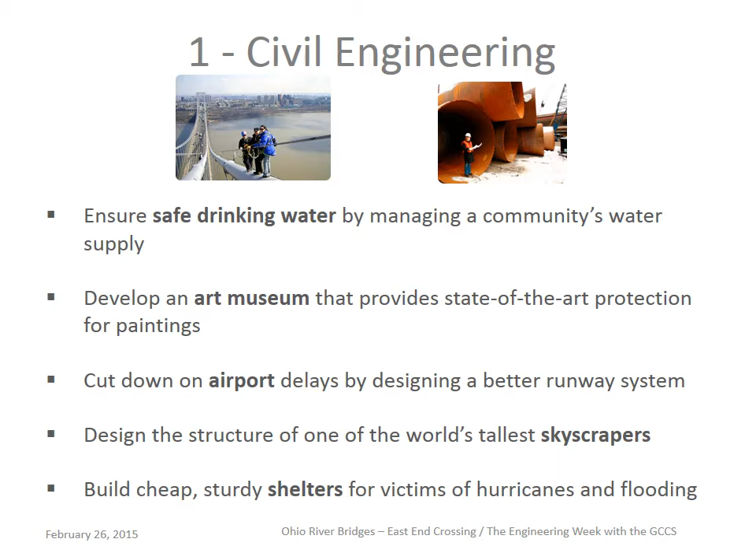A video from the American Society of Civil Engineers will now be streamed. In this video, you will be able to listen to the point of view of 3 civil engineers on what they do.

Now, we will give you an overview of what's happened on the Ohio River Bridges East End Crossing. First, who is involved in this project? Walsh Construction and Vinci Construction Grands Projets set up a joint venture for performing together the design and the construction of the Ohio River Bridges East End Crossing. Another joint venture has been set up between Bilfinger, Walsh, and Vinci for the operation and maintenance of the project.

The construction stage started in 2012 and should be completed at the end of 2016. And the operation and maintenance stage will last 35 years from the beginning of the construction. This project is particular. Actually, this is the first availability-based transportation public-private partnership project in the states of Kentucky and Indiana. This new kind of project brings together the public side of a state with private companies to create new infrastructures necessary for the development of communities.

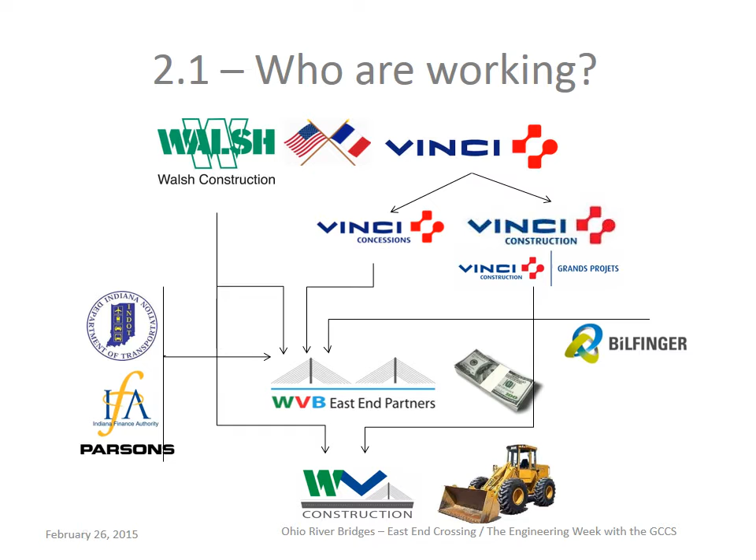Now, we will show you where this project is ongoing. Actually, the Ohio River Bridges includes 2 projects. One in the downtown of the city of Louisville, and one other in the eastern part of the city. The Ohio River Bridges East End Crossing project is the highway which will allow crossing the Ohio River and linking the 265 in the eastern part of Jefferson County.

On the map you can see in red color the Ohio River Bridges East End Crossing. And you can see the location of your school, Jeffersonville High School, Charlestown High School, or Washington High School.

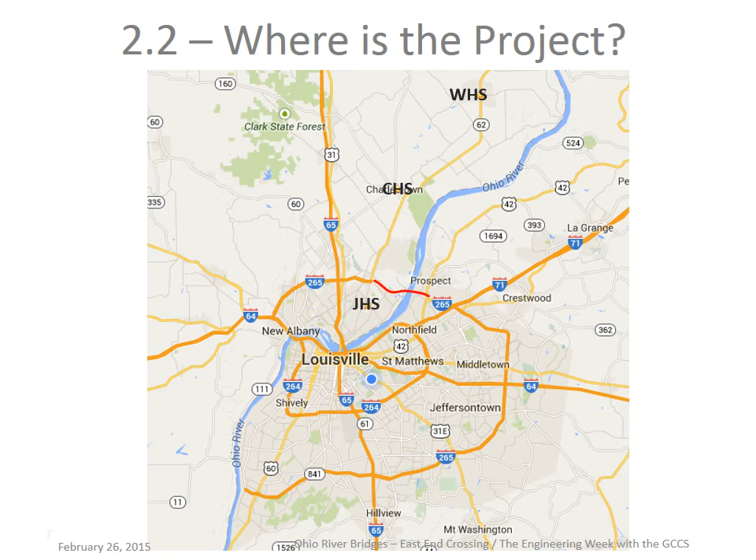So, what is under construction? In Kentucky, there is a twin tunnel, which has been planned to cross the historic Drumanard Estate. As the highway should be planned as straight as possible, a couple of bridges are under construction to cross existing roads and streams in the area. Moreover, a cable-stayed bridge is under construction to cross the Ohio River. And in Indiana, bridges and interchanges are in progress to link the highway to the existing 265.

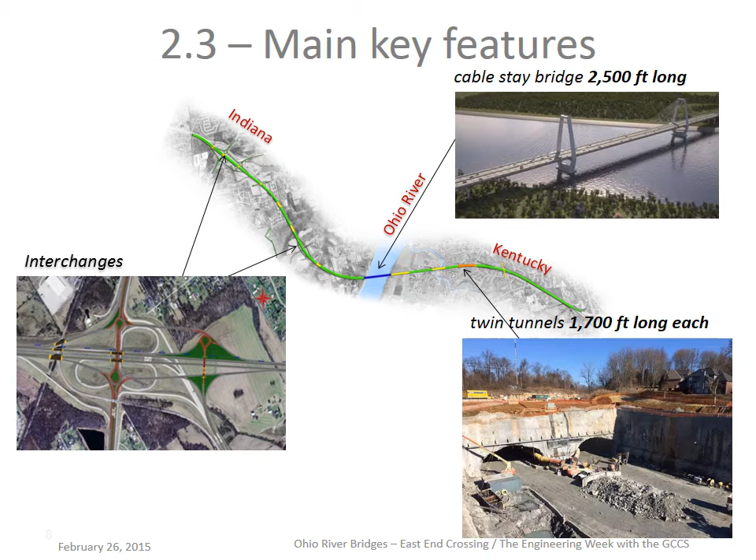As a picture may be worth 1,000 words, a 4-minute video will show you the main parts of the project. In more detail, in Kentucky, we are building 4 bridges and a tunnel as shown on this slide.

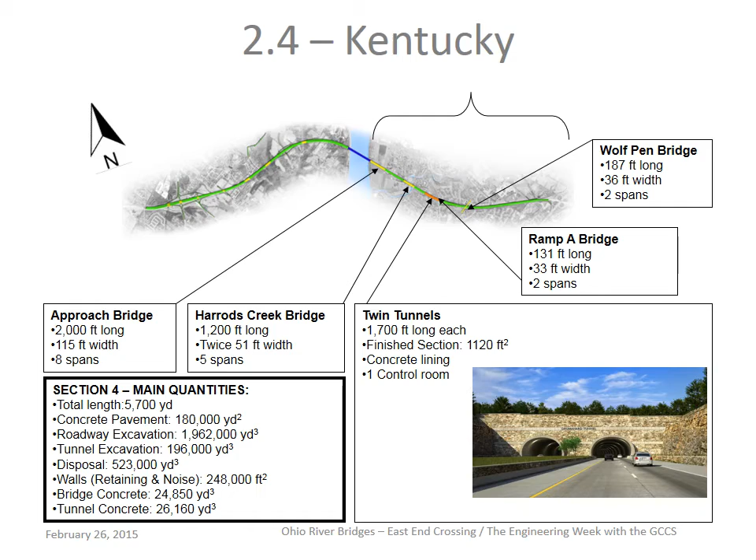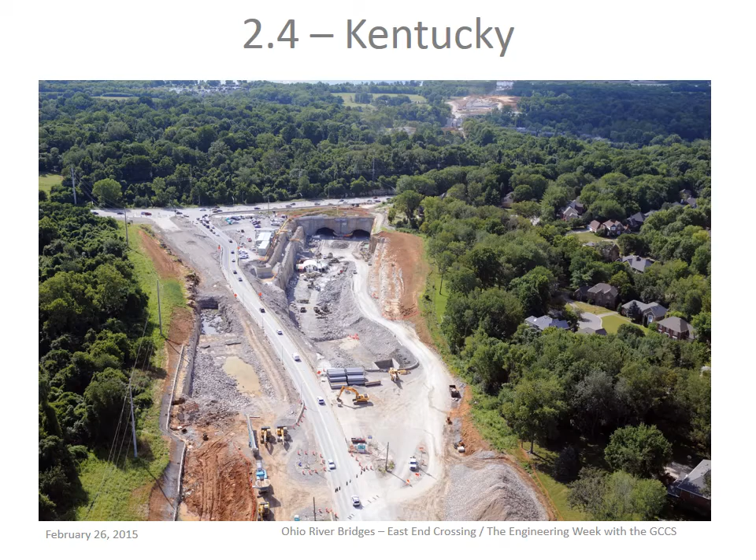On this picture, you can see the entrance of the tunnel in the foreground, and its exit in the background of the picture. It highlights that the historical area of Drumanard is preserved from any impact that a highway can have. In September 2014, the tunnel breakthrough was completed. It means that the tunnel goes from its start to its end under the Drumanard Estate area. Now, on this other picture taken this summer, you have an overview of the construction which is in progress along an existing road.

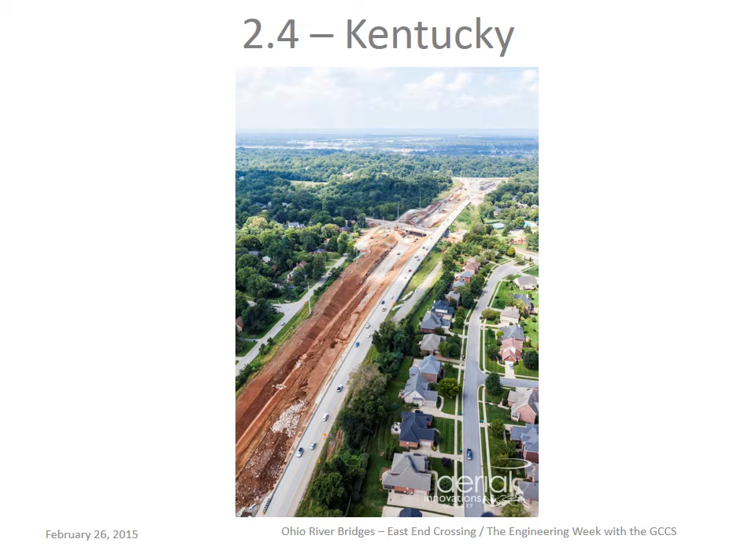Then, to cross the Ohio River, a cable-stayed bridge is under construction. This bridge stands on 2 concrete towers which extend approximately 300 feet above normal pool elevation. These towers are currently in progress and will become the dominant visual element of the bridge. The bridge deck will be in steel concrete composite to minimize the weight of the bridge. And finally, this bridge will be supported by 104 parallel strand stay cables.

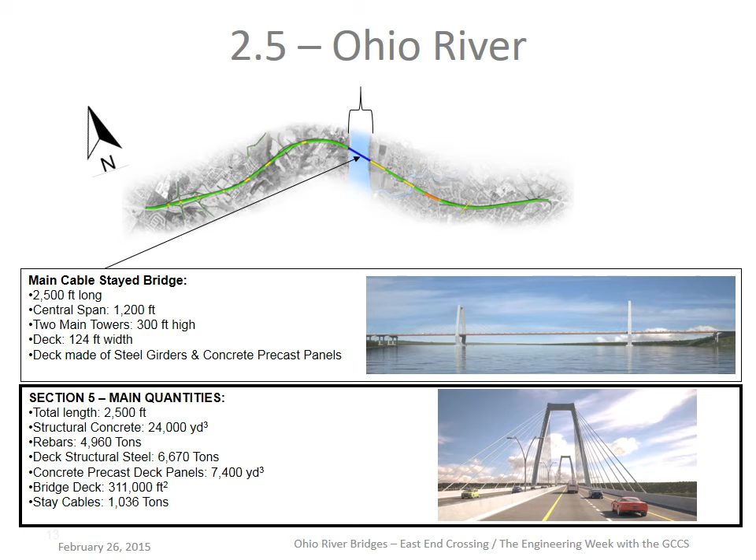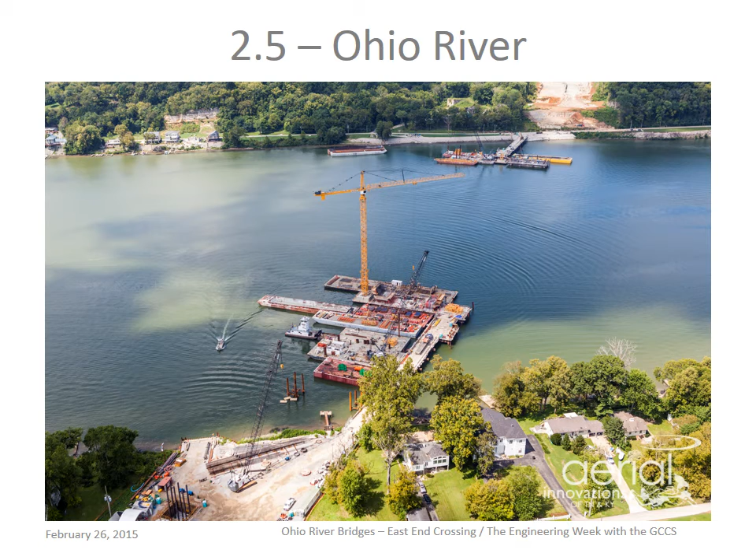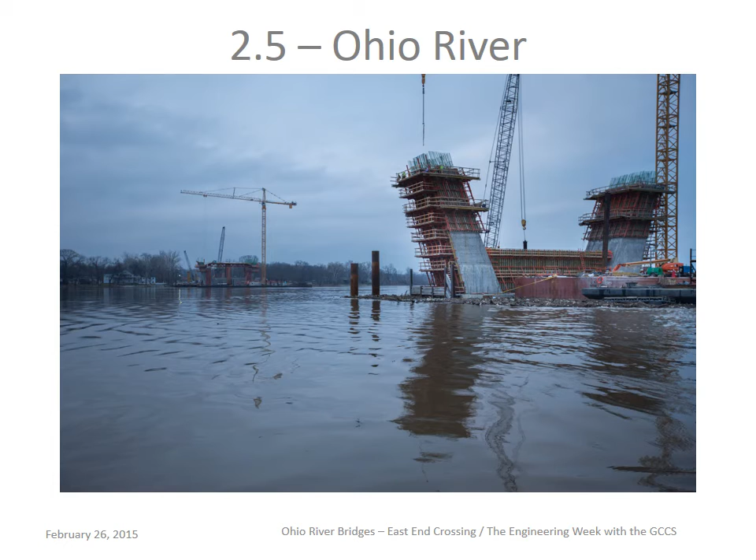Here is a picture of the Ohio River taken this summer when the preparatory works of the foundation of the bridge were in progress. And here, a picture of the progress of the Ohio River Bridge in December 2014. You can see that the towers of the bridge appear out of the river. And finally, this picture, taken in December 2014 too, gives you an overview of the equipment and materials which are used to erect the tower on the Kentucky side.

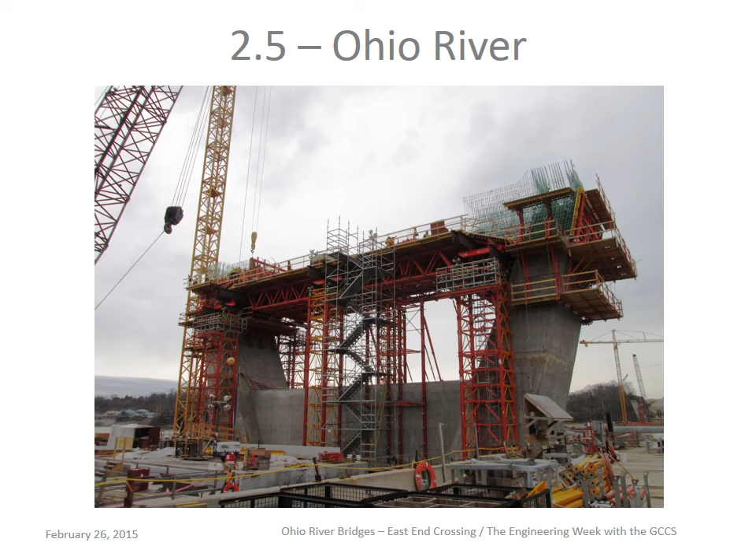Now, we will see in more detail what's happened on the Indiana side. In Indiana, we are building several bridges to link the highway to the existing 265. Moreover, interchanges are necessary and in progress to link our project to existing roads in the surroundings. The management of traffic is an essential part of the works in progress in Indiana because our project has to be performed by taking into account existing roads. And at the end, the traffic in the area has to be efficiently managed.